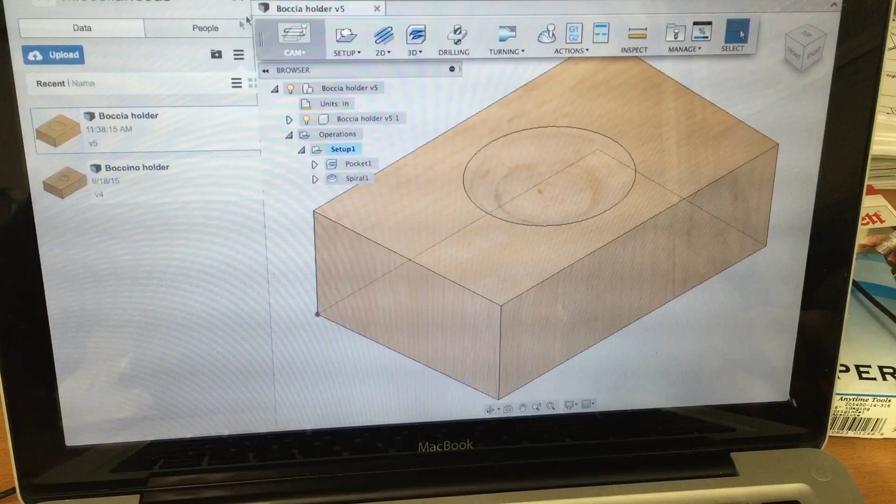Alright, so here we are in Fusion 360. We're going to open this file for the bocce ball. I have one for the bocce ball and one for the boccino that I previously worked on. So as you can see, it's basically just a depression on a piece of wood there, and the bocce ball will sit right there.

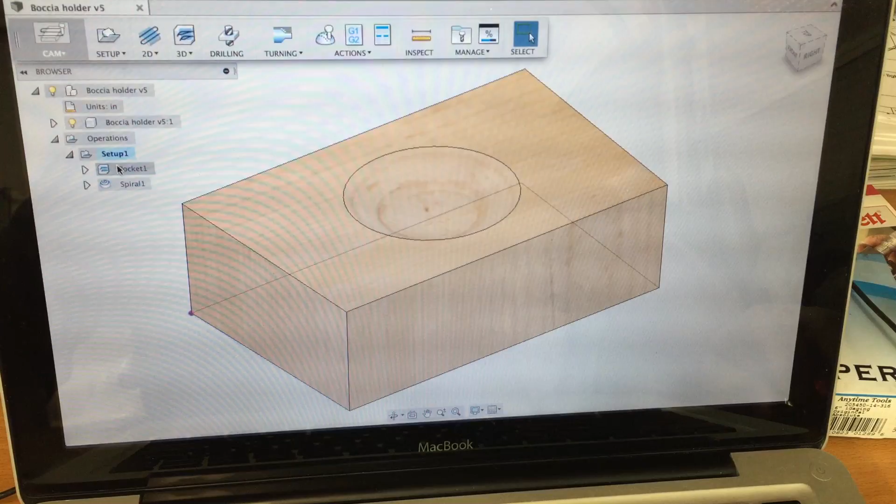So the one thing is that we're going to have to 3D machine this, and this is not something I've done very often. You can see I set up a couple of operations here. The first operation is a pocketing operation. It's going to go down and cut circular pockets at about 3 or 4 different levels, so it'll have steps, and then we come back with the same tool, which is a ball end mill. But this time with a spiral to finish the profile of the depression, and it's going to be the same identical thing for the boccino.

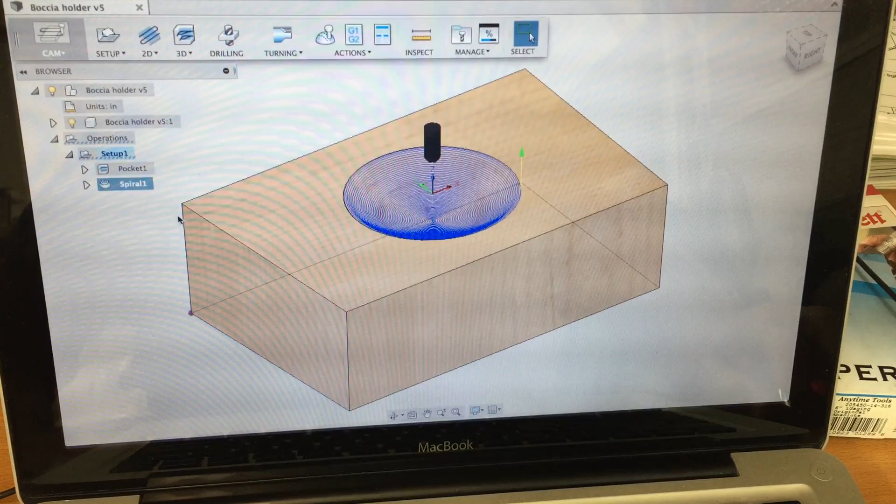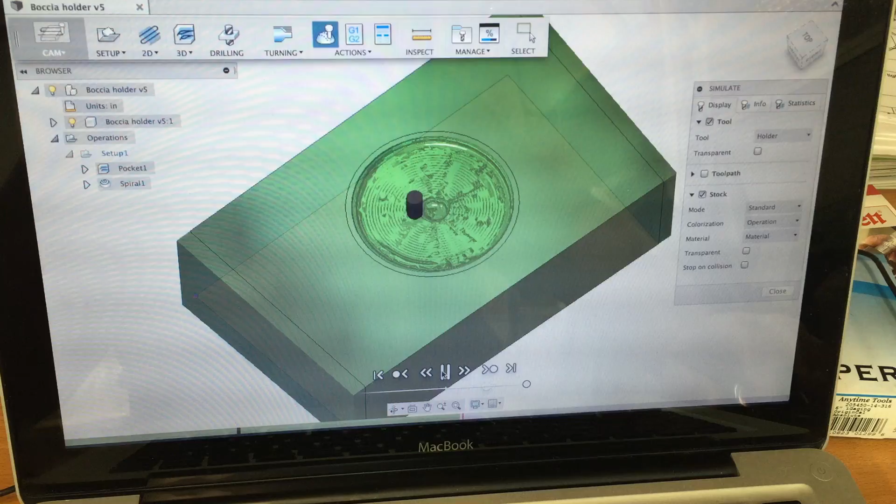Alright, so we're going to try to simulate the cutting of this depression, and we're going to action and simulate, turn the stock on. So we can see the depressions here, that's the steps. It should be 3 or 4 steps, and this is a roughing operation. You can see there's some clear steps in between here. Once the last step is done, it'll go in with a spiral operation and clean up the depression, make it nice and smooth, so the bocce ball is going to fit real nice in there.

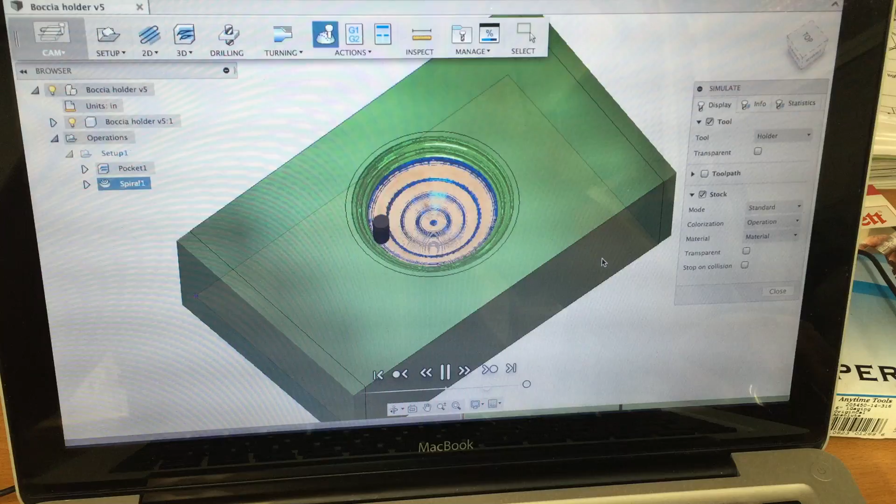So now, before we go cut this big old piece of wood and find out how we can put that on the little mill, I thought I'd cut it on a piece of scrap 2x4 first, make sure the code works fine, because we don't want to mess up this long piece of pressure treated lumber. Incidentally, that's about 60 pounds or so, pretty heavy duty.